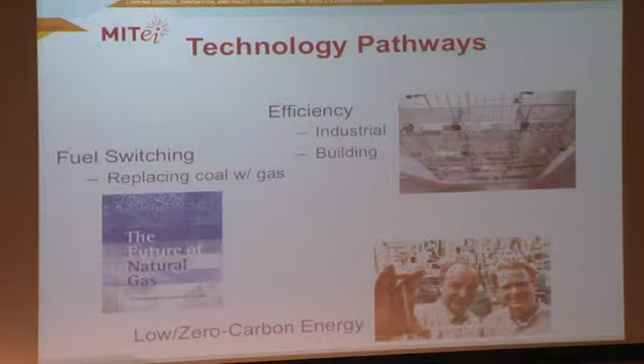So I'm going to talk about technology options that we can employ today—3 principal routes we can take with technology today. The first of those, in the top right here, is building efficiency, or efficiency more generally. How can we get more use out of the energy we consume, get better use of it, so that we reduce the energy intensity of our system. I'll give some examples there.

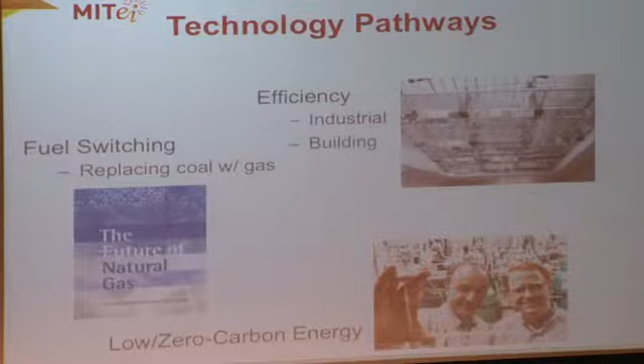A second approach we can use is fuel switching. Take advantage of the fact that we can move in some sectors, particularly power generation, from high carbon content fuels to lower carbon content fuels, and with the same production of electricity, have a smaller carbon footprint. So I'll talk specifically about switching from coal to gas, which is certainly underway in the U.S.

...in a big way today.

And then lastly, I'd like to talk about research and development to drive down the cost of low or zero carbon energy solutions. In the absence of a price on carbon, you'd love to get there just through technology alone. If I could develop the magic technology and make a zero carbon energy system that's cheaper than fossil energy systems, then I would have a winner. I doubt we'll get there, but in any scenario, the lower we can get the cost through technology, the better off we are.

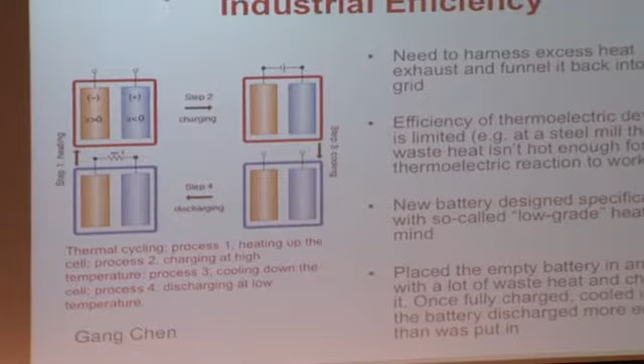So let me give you maybe half a dozen little vignettes of technology contributions in those three areas. I'll start with efficiency, because I think everyone agrees this is the low-hanging fruit. There's a lot of disagreement over why we're not picking up all this low-hanging fruit, but it is there, and there's a lot of interesting technology we can apply to taking advantage of efficiency options.

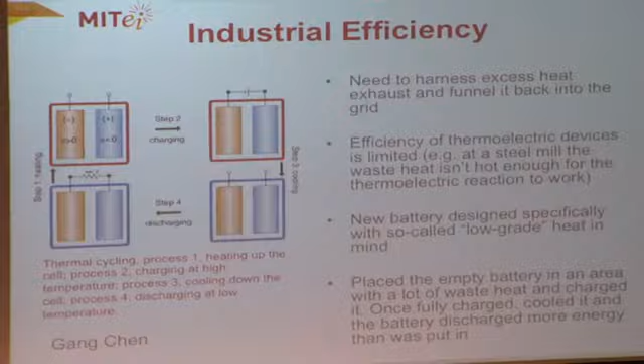Here's an example of a way to take advantage of waste heat. This may not be something you think about every day, but it's a really important problem in the industrial sector and the power sector in the U.S. and other major economies around the world. Much of the energy we produce brings along with it what we call low-grade heat. It's heat and energy, but at such a low temperature you can't do useful work with it. So it's generally just thrown away, exhausted into the air, exchanged with water for cooling, but otherwise lost. So a big question is, can you take that waste heat and use it as a source of important energy for useful applications?

An instance you may be familiar with is combining power plants with district heating. If you take the waste heat that comes out of a power plant and you're close enough to residences or businesses that need heating for space heating, then you can use that waste heat from power production for domestic heating.

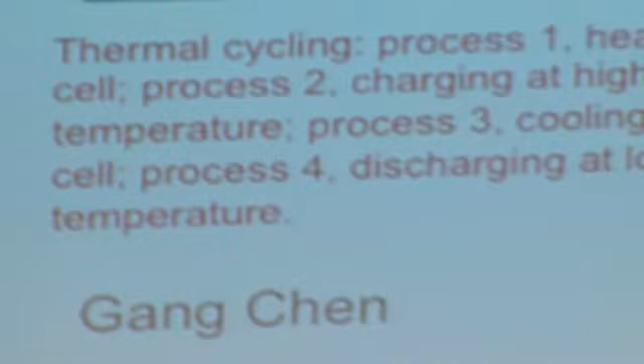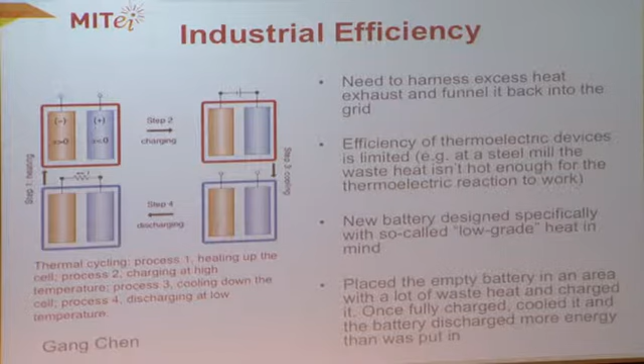This is an example of using waste heat to improve the efficiency of battery storage. Here you take advantage of the fact that for rechargeable batteries, the voltage at which the battery works is different depending on temperature. At high temperatures, you generally have lower voltage; at low temperatures, higher voltage. So the idea is to heat up a rechargeable battery in step one. Then when it's hot, you charge the battery at lower voltage. You cool down the battery, and then it operates at higher voltage, and you discharge it. So you get more energy out of the battery than you put in through the charging process.

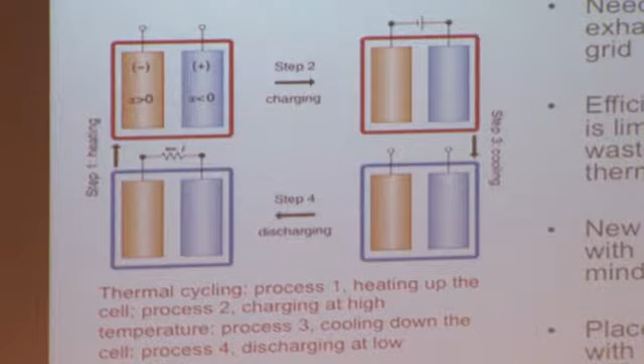Now you get skeptical and say that can't be—you don't get more energy out of the battery than you put in just through the charging process. The other energy comes from the heating step. But you're using waste heat, low-grade heat, that otherwise you would throw away to the environment. This is work from a lab here at MIT, Gang Chen in mechanical engineering, and collaborators at Stanford University. Early experiments promise a 5 to 6% increase in efficiency of the battery system, which could be very important for large-scale storage applications.

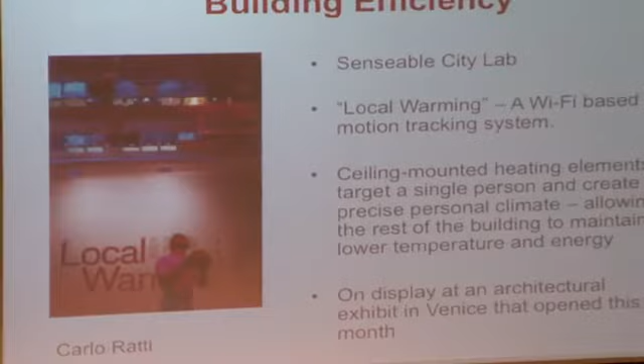Second example is how we warm buildings to make occupants comfortable. Generally what we do is heat the entire space in a building—well, certainly in New England, we mostly heat spaces. On a day like today you think more about cooling, but this example focuses on heating. There's a lot of space where there are no occupants at a given time, so you're wasting all the heat you put in.

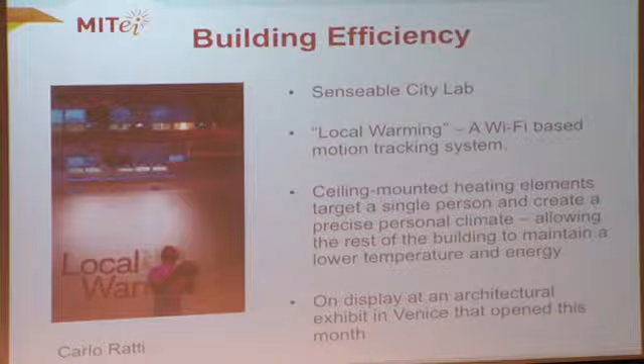Here's an idea from Carlo Ratti's Senseable City Laboratory here at MIT, where he takes advantage of the fact that we all walk around with a lot of Wi-Fi broadcasting equipment on us. You can use that to track where occupants of a building are, then use that signal to direct ceiling-mounted infrared heating sources to warm people where they are. So you just warm locally around your environment—a bit like sitting outdoors at a restaurant in New England when it's a little too early in the spring, with those little radiant heaters they put over you.

That's a way to take advantage of the localized heating capability, not waste heat elsewhere in the building. And with more information from your cell phone, you could actually tune the temperature you like as an occupant, so you can adjust the comfort level individually.

Third example of efficiency is fuel switching. Here we want to take advantage of the fact that not all fossil fuels are the same. Some of them have a lot more carbon in them per unit of energy than others. In particular, coal has the highest carbon content, natural gas has the lowest. Interestingly, both of those are used in large quantities in the power sector. So what we're looking at here is the opportunity to switch from coal to natural gas and save on our carbon footprint.

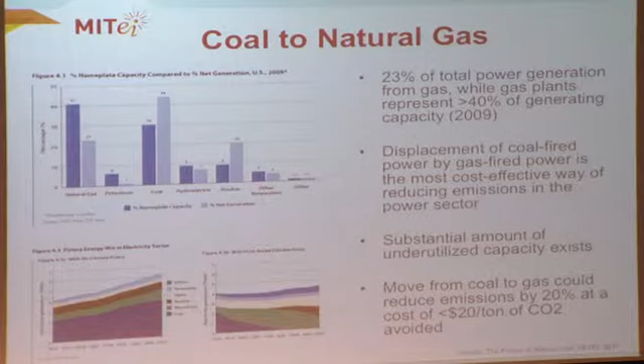To do that efficiently without a price on carbon, you need to be able to take advantage of existing infrastructure. If this meant going and building a lot of new natural gas-fired power plants, it probably wouldn't be economical. But it turns out that we have today, because of overexpansion in the 90s, the U.S. has a large excess capacity of natural gas combined cycle power plants, so-called NGCC plants.

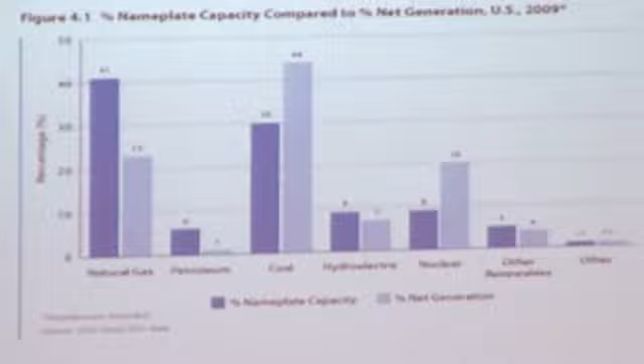You can see that in this top graph, which looks at, in the dark blue bars, the percentage of nameplate capacity for production of energy, and in the light blue bars, the percentage of actual output of energy from these different power plants. You can see that there's a little bit better than 40% of the capacity for the power sector in natural gas power plants, but somewhere in the low 20s is the actual output. At least that's as of around 2010 to 2011. Actually, that's 23%.

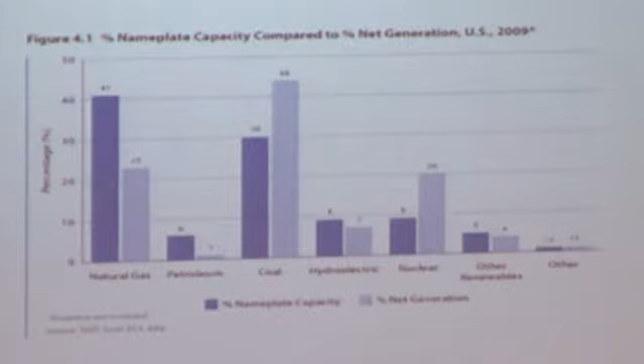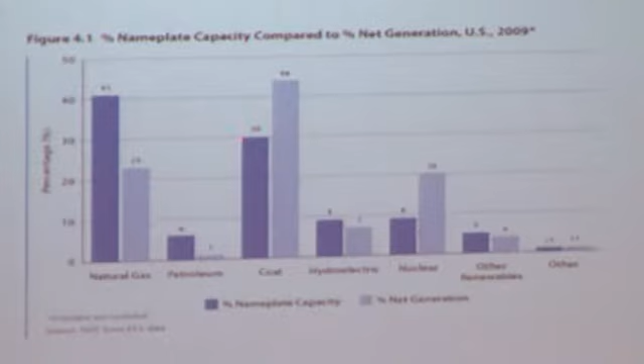Coal, on the other hand, has a lower capacity in terms of baseload capacity, but it's used more. It's used as baseload power capacity. So there's actually more electricity produced from coal in the U.S. than by natural gas. But you see from the blue bars, there's the capacity sitting on the ground to make the electricity from natural gas instead, without building any new capacity. It's just a matter of fuel switching.

And in fact, we've seen that in the U.S. over the last couple of years, driven simply by the price difference in natural gas as more shale gas comes online. Two years ago, natural gas and coal-fired power were almost at parity in the U.S. This past winter, because of the severe winter, natural gas prices spiked and coal went up a little bit relative to natural gas, but not to these previous levels. So we're actually moving in the direction of lower carbon emissions from our power sector simply because of price changes in the fuel system.

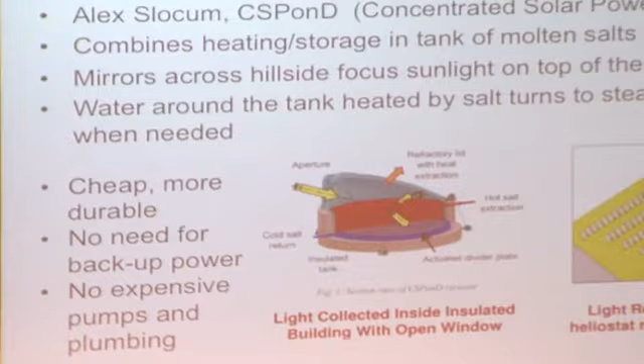Lastly, I'd like to look at low or zero carbon technologies for producing energy. I'll use solar as the prime example here, because I think we all agree that solar is the big renewable resource we have. The problems with solar are twofold: one is how to make it cheap enough, and the second is how to make it dispatchable. What do you do at nighttime, fundamentally?

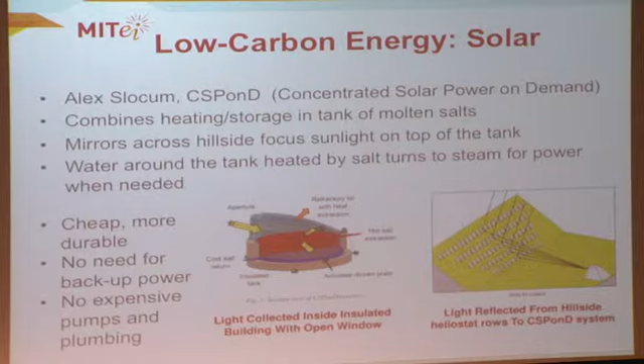This is an example of a technology in solar called concentrated solar power, in which you take incoming solar radiation and use mirrors to focus it on some receiver that gets really hot. Then you use that hot receiver material, generally a fluid that you heat up, to drive a power cycle, much like you would use in a coal-fired power plant or a natural gas power plant.

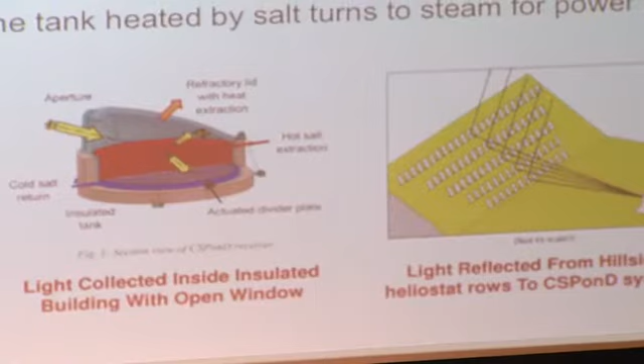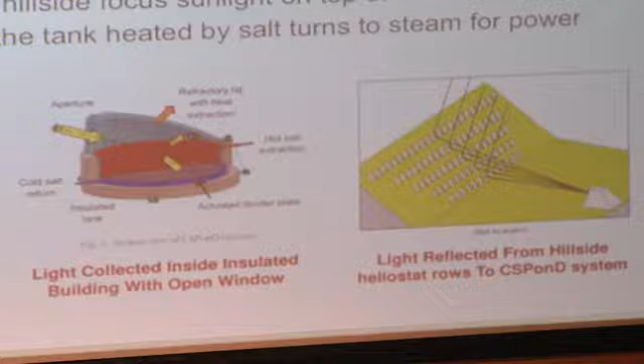In this novel arrangement for concentrated solar power, there's an arrangement of mirrors that you can put either on a hillside or in a flat plane, which beams solar energy into a big tank full of molten salt. You use something like a potassium, sodium nitrate mixture, which melts at very high temperatures, around 220, 230 degrees centigrade. And you heat that up to 550 degrees centigrade or so, which is near the upper limits of traditional steam power cycles.

So you heat this bath of fluid up. During the daytime, you can actually heat up excess fluid, so you can have what I draw as blue stuff at the bottom—that's cold fluid.

Cold in this case is maybe 250 degrees centigrade. But then you heat it up with excess solar during the day to 550 degrees or so. Then when you need power, whether it's day or night, you can pull out hot molten salt.

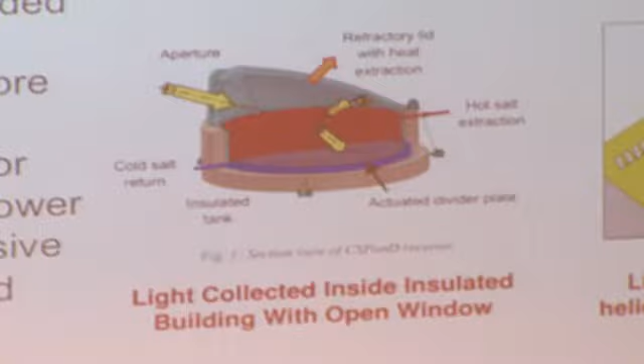You can run that through a heat exchanger to produce steam to drive a traditional steam power cycle. And again, this is dispatchable because you can use it day or night. This overcomes a number of problems with today's concentrated solar power technologies. One, you have built-in storage. Two, with this molten salt, you can go to very high temperatures, well above 600, which limits a typical steam power plant, and you can go to much more efficient power cycles.

You can, for example, use what's called a Brayton cycle, which uses a gas as the working fluid. It's what's driving you when you're flying on a jet - jet engines use a Brayton cycle. And that gets rid of water cooling problems, which are a big issue with concentrated solar. So there are interesting solar technologies on the horizon that promise higher efficiency and also dispatchability.

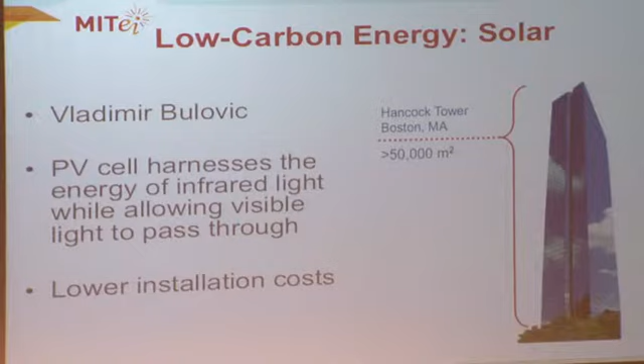The other big solar technology, of course the biggest solar technology today, is photovoltaic. There are lots of different innovations underway with photovoltaics. An example I'll show is a photovoltaic technology looking at the photovoltaic materials and the electrode materials, how to design those with material science to make them transparent. If you can make them transparent, then you can cover lots of surfaces we have around cities, like the glass in the John Hancock Tower, with PV material. The occupants still get light in to light their work, but you can make electricity from all of that surface area. Just to give an example, you could also put this on your iPad or cell phone so you could charge it while you were working.

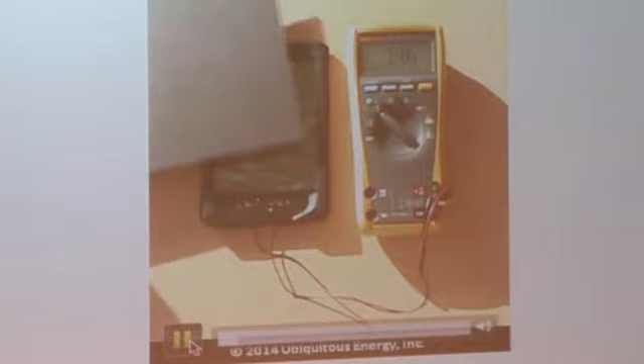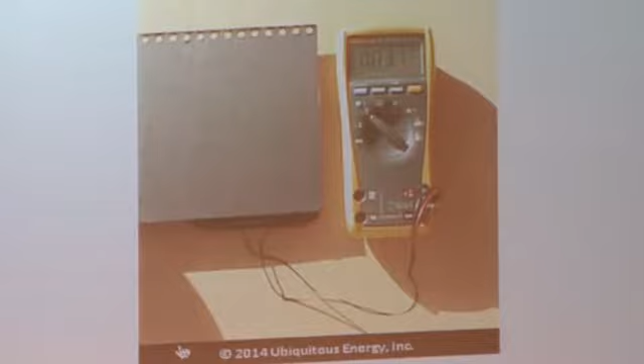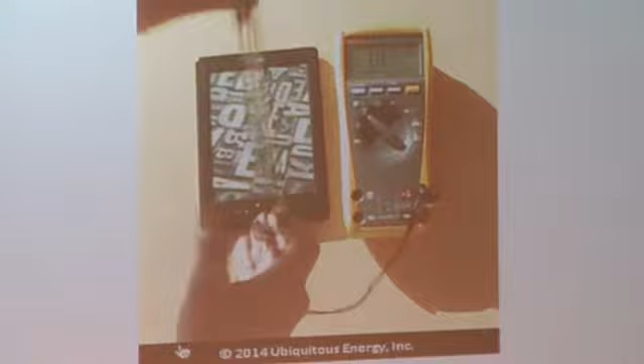Here we go. So this movie illustrates the transparency of the glass and the PV material. You can see that when you cover up the surface on this little cell phone, the voltage drops there, so that in fact you are powering it from the light it's receiving. If you remove the glass cover, you can see that it is transparent. So we do have the technology to do this.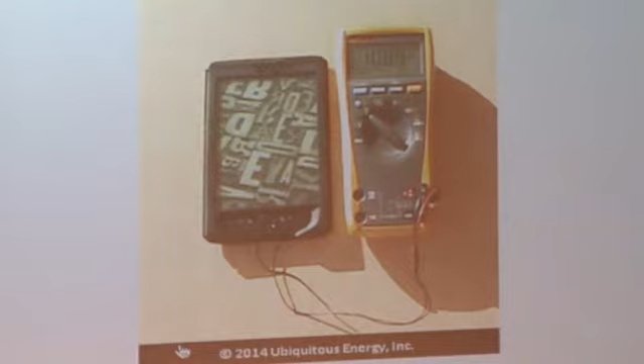We need to make it more efficient, to be sure. And for building applications like a big commercial building, the John Hancock Tower, you need better ways, better technology for connecting it to the building's electrical system. But I think there's a lot of promising technology there.

The other challenge here with PV in particular is storage. So how are you going to store the energy for nighttime use? There's a lot of work in the battery space going on.

This is an example of a novel battery system which uses two liquid electrode materials, or two liquid electrolytes, which rather than being separated by a membrane, as is typical in a battery like this, are separated simply by the flow pattern. It's what's called a laminar flow pattern. So they flow side by side and don't interact over the distances of the battery.

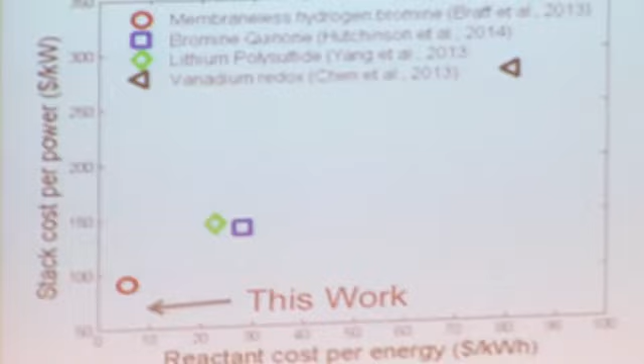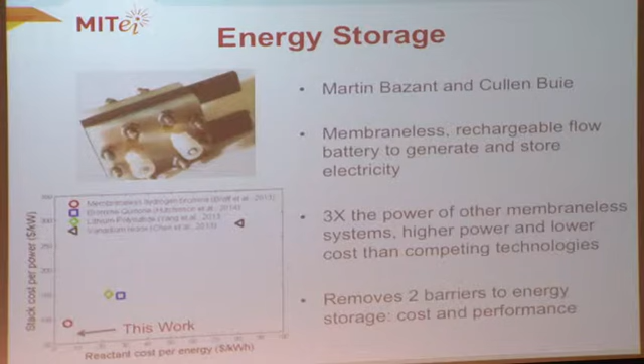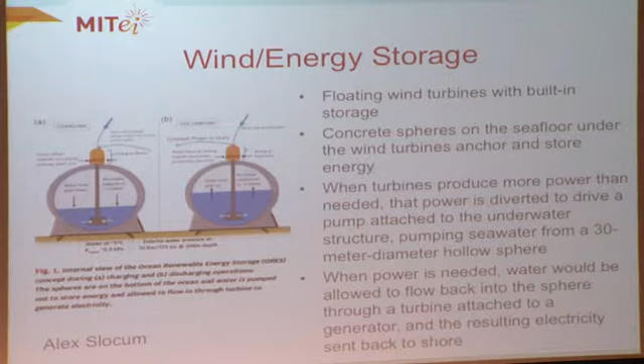Last example is storage for wind, as another example for how we might do storage with intermittent renewables. One of the most attractive wind sources is offshore wind, because offshore wind velocities are generally larger than onshore, and they're generally more sustained. So it's a good place to put wind.

It's also interesting in that it's easy to provide a storage solution with offshore wind if it's far enough offshore that you need to use a floating platform. If you have a floating platform, then you have to have some way to anchor or tether the platform to the bottom of the ocean.

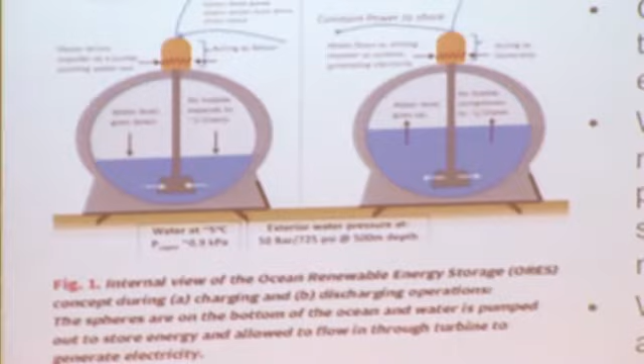In this idea from Alex Slocum in mechanical engineering here, he uses a series of large hollow concrete spheres or structures to serve as anchors. And the idea is that when I have excess wind, I use the power I don't need to transmit to shore to pump water out of this big sphere.

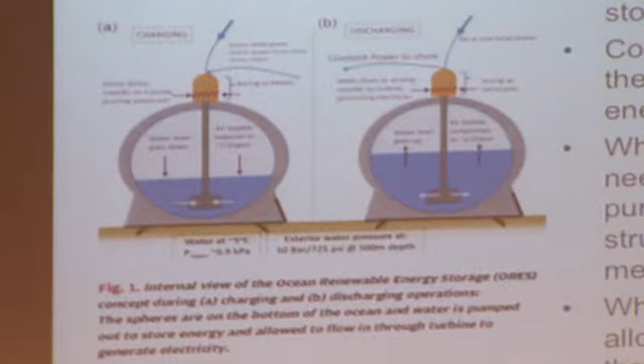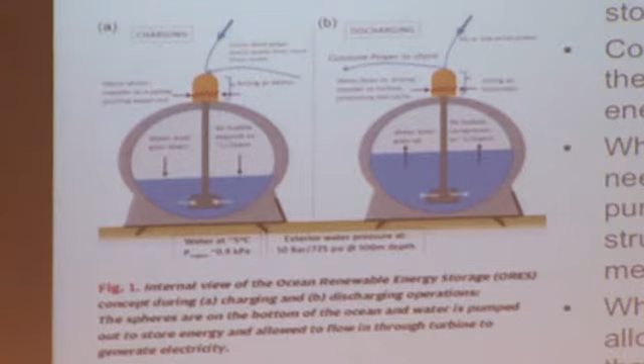When I don't have enough wind, I can let the water flow back into the sphere and drive a turbine as it flows back inside. So essentially, I'm using the anchoring system as a pumped hydro storage system. It's much cheaper than trying to build a pumped hydro system on shore.

So I've given you a couple of brief examples of technology solutions to moving towards reduction of CO2 emissions in the energy space. That's an example of game-changing technologies for improving the environment.

These game-changing technologies in energy can also have a big impact on the U.S. and other nations around the world in terms of economic growth. They provide jobs for people to build these new devices, new industries. And I think it provides security in that it provides people around the world available energy that doesn't require the global transmission systems or trade systems that we often need.

A message that I would like to leave you with is that one of the things I think we need in this country is more and sustained R&D spending to keep this pipeline of innovations in the energy space going.

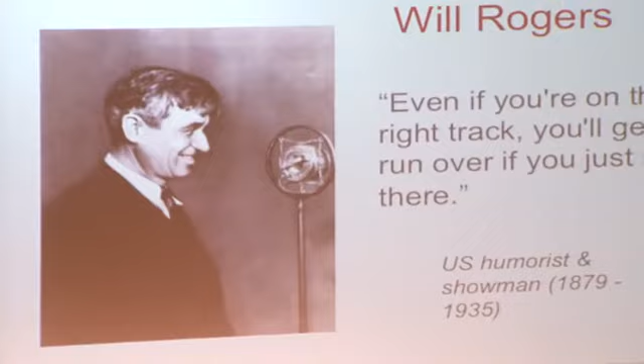So with that, now thank you for your attention and leave you with this note that we can never be too complacent. I love Will Rogers' comment that even if you're on the right track, you'll get run over if you just sit there. Thank you very much.

I think I used up my time. Do we have... We might have time for one question before we start the next presentation. Is there anyone that's got a question for Robert? Right here? There's a mic behind you.

I was hoping you could spend a couple minutes talking about maybe Nocera's work on the photovoltaic and what about nuclear fusion? Like how far off would that be? Is that a possible game-changing technology that we'd see in the next decade or so?

So I'll say a few words about at least the first one. Robert, if you could use the microphone, because it's being recorded. Okay, so let me say a few words about the first one.

We don't have a lot of time, but with solar storage for solar energy, there are two timescales you have to worry about. One is day to night, and I think you could do that with batteries and the ideas I've shown. There's another storage timescale which is seasonal. How do you get from summer to winter, which in the northern hemisphere we're quite familiar with, but there's obviously a similar problem in the southern hemisphere. There's also the issue of how can solar make a difference in the transportation market, and there you have to electrify otherwise, and battery storage for cars is a challenge.